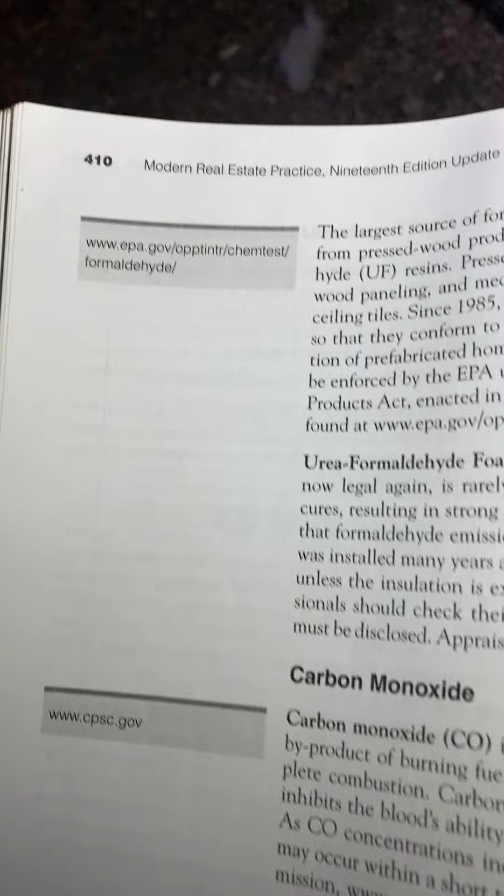Modern Real Estate Practice, page 410.

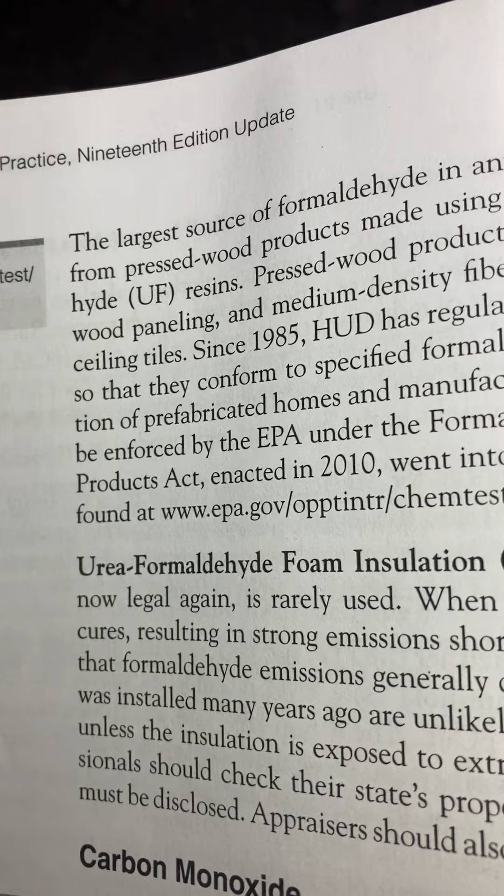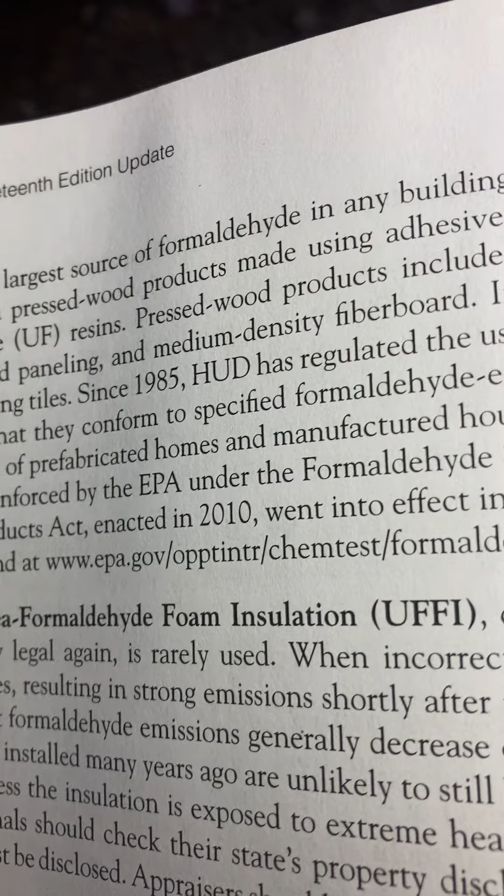The largest source of formaldehyde in any building is likely to be the off-gassing from pressed wood products made using adhesives that contain urea formaldehyde, UF resins. Pressed wood products include particle board, hardwood plywood paneling, and medium density fiberboard. It is also used in carpeting and ceiling tiles.

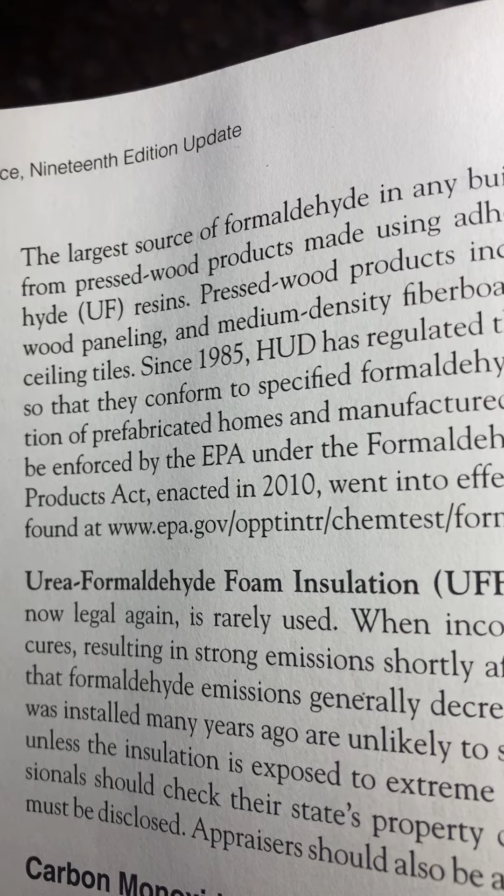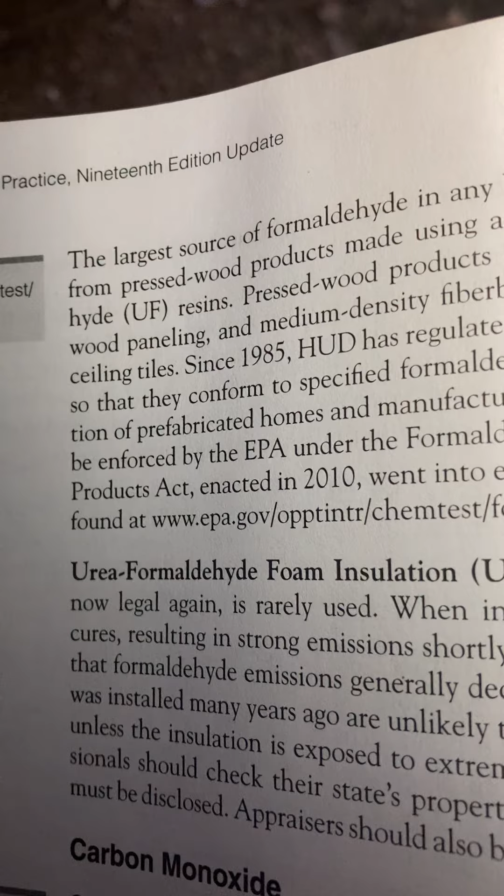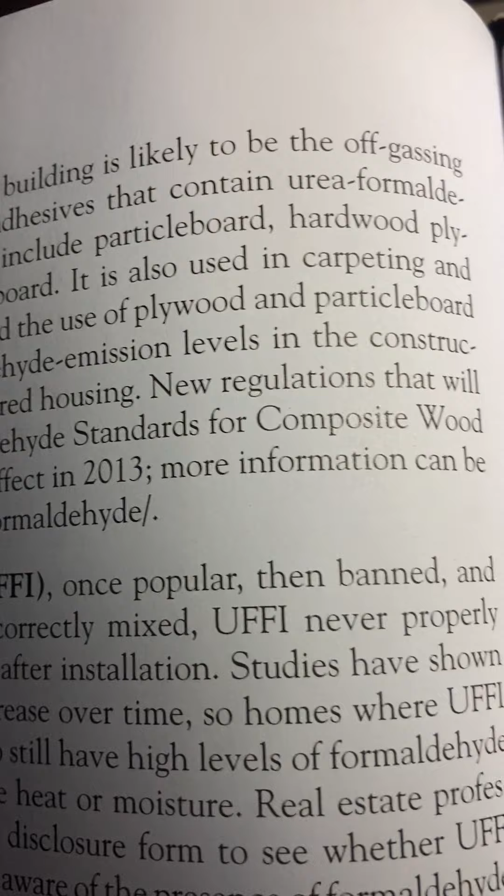Since 1985, HUD has regulated the use of plywood and particle board so that they conform to specified formaldehyde emission levels in the construction of prefabricated homes and manufactured housing.

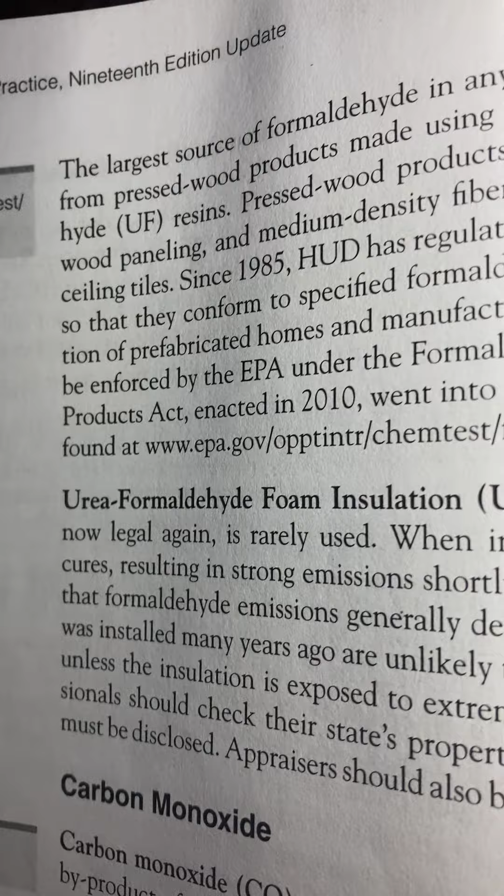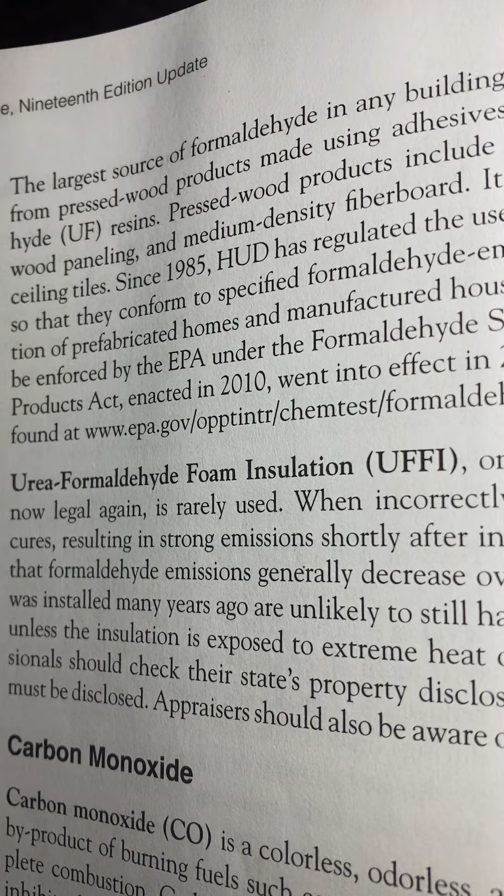New regulations that will be enforced by the EPA under the Formaldehyde Standards for Composite Wood Products Act, enacted in 2010, went into effect in 2013. More information can be found at www.epa.gov/opptintr/chemtest/formaldehyde/.

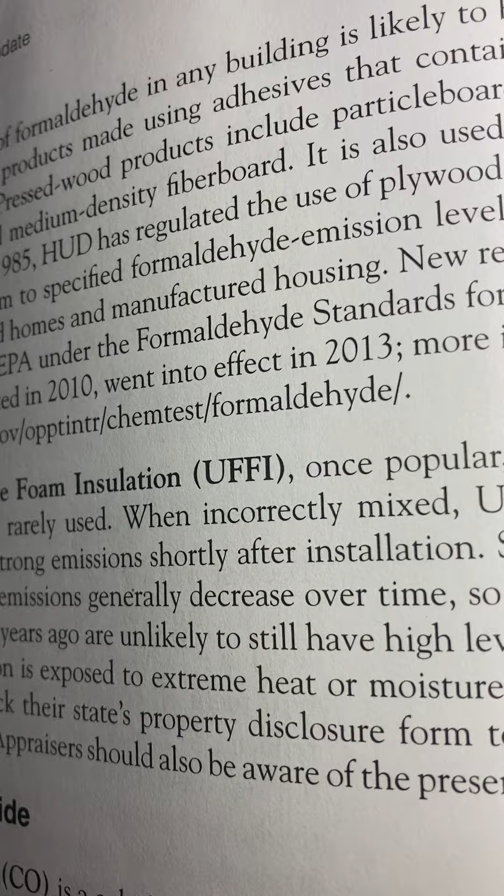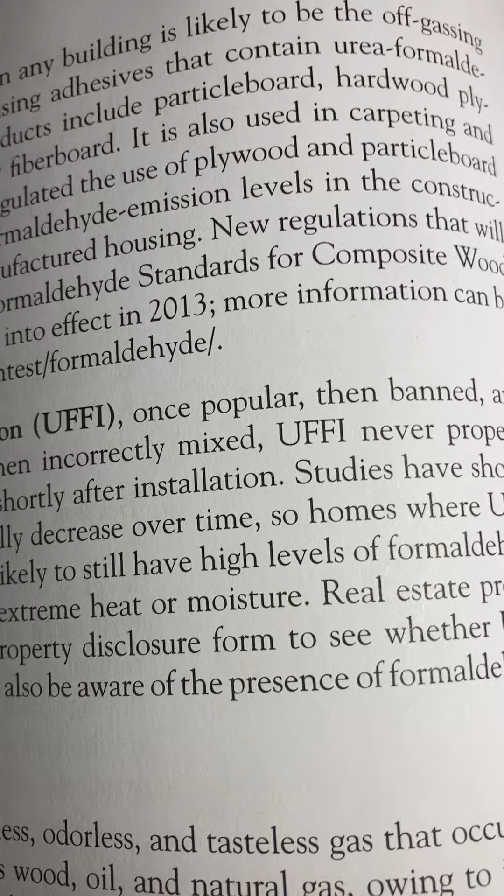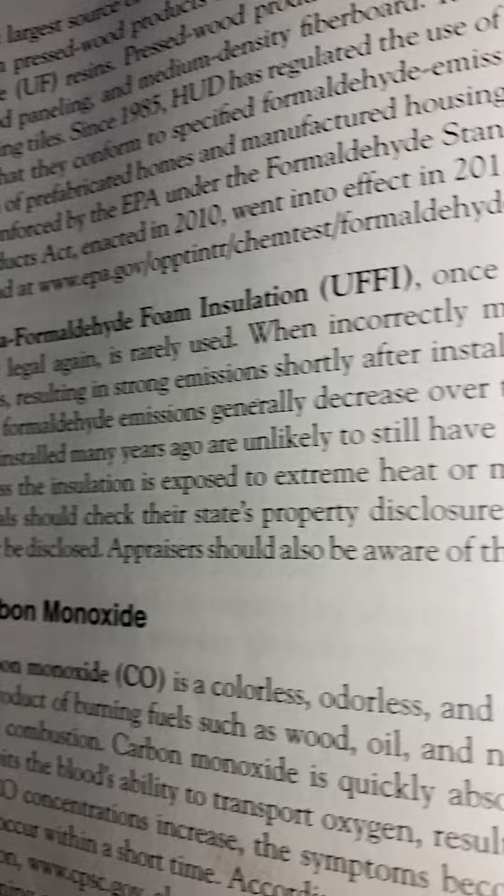Urea formaldehyde foam insulation, UFFI. Once popular, then banned, and now legal again, is rarely used. When incorrectly mixed, urea formaldehyde foam insulation never properly cures, resulting in strong emissions shortly after installation.

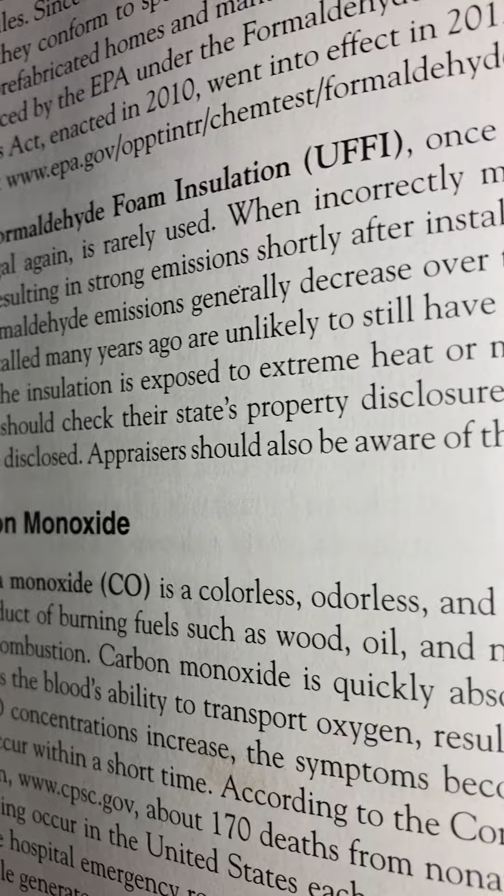Studies have shown that formaldehyde emissions generally decrease over time. So homes where urea formaldehyde foam insulation was installed many years ago are unlikely to still have high levels of formaldehyde unless the insulation is exposed to extreme heat or moisture.

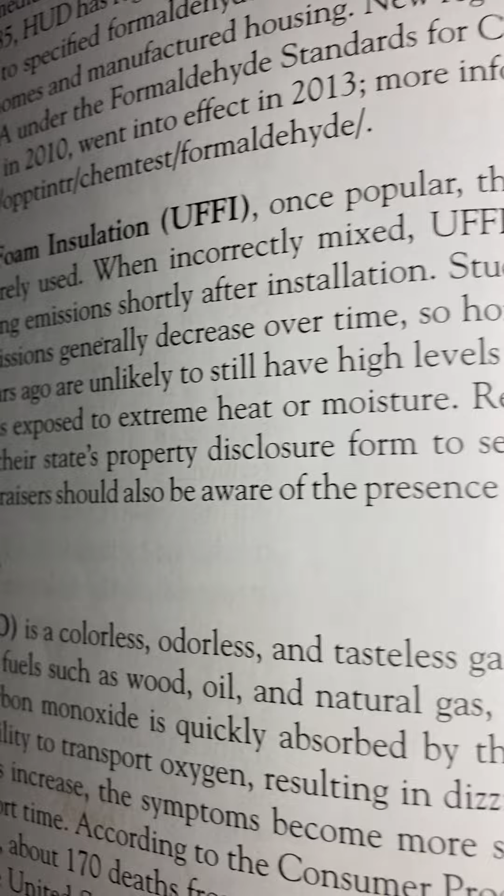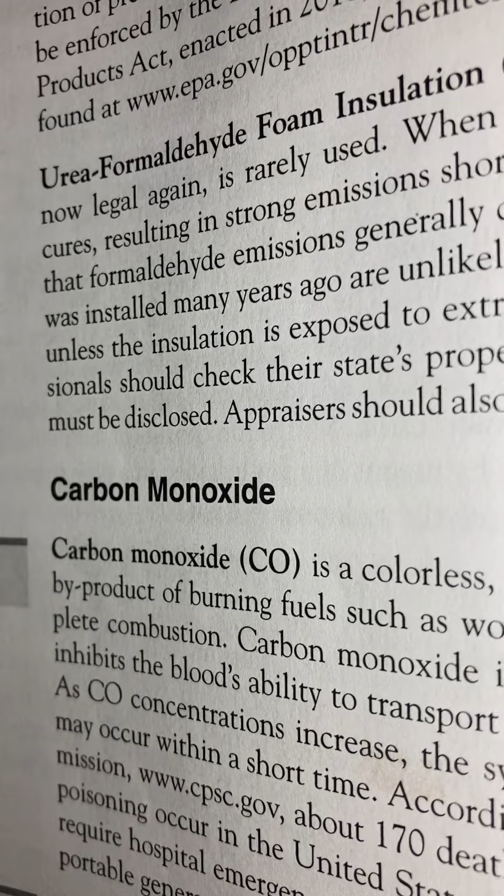Real estate professionals should check their state's property disclosure form to see whether urea formaldehyde foam insulation must be disclosed. Appraisers should also be aware of the presence of formaldehyde.

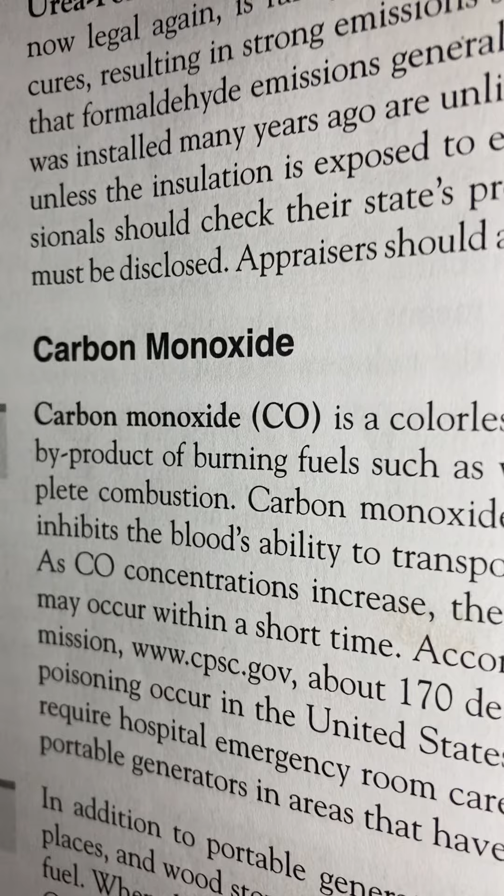Carbon monoxide. Carbon monoxide, CO, is a colorless, odorless, and tasteless gas that occurs as a byproduct of burning fuels such as wood, oil, and natural gas.

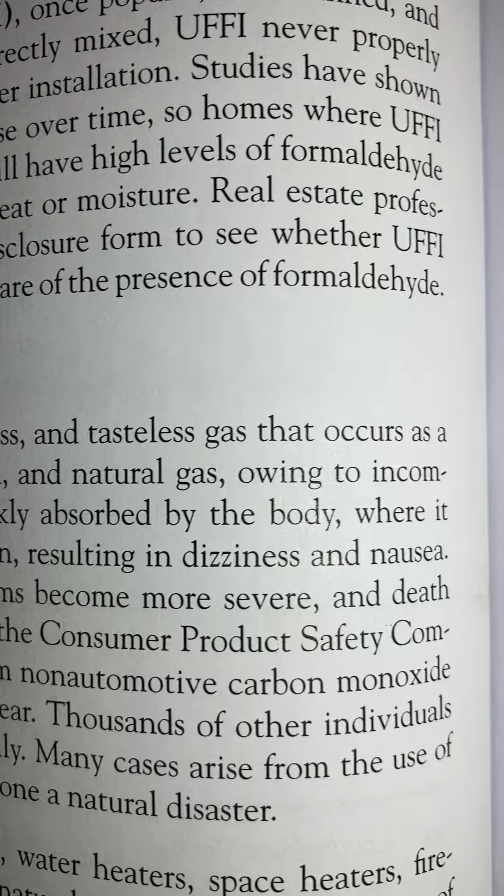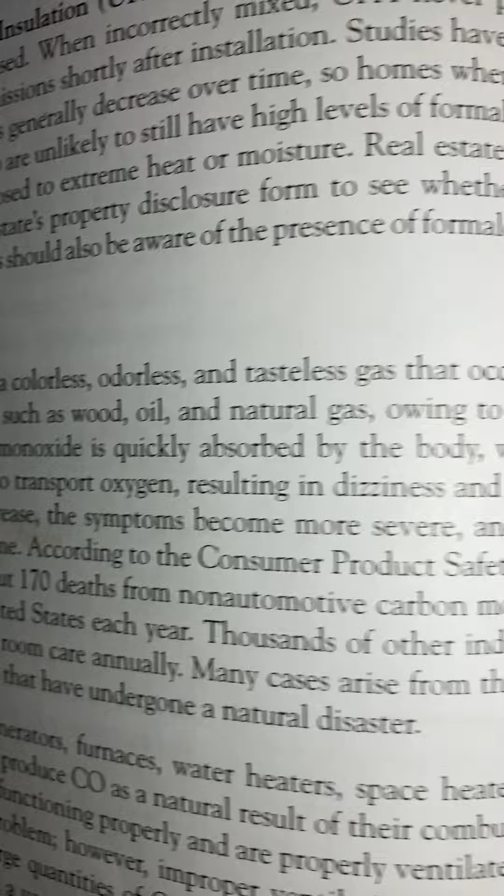Owing to incomplete combustion, carbon monoxide is quickly absorbed by the body, where it inhibits the blood's ability to transport oxygen, resulting in dizziness and nausea.

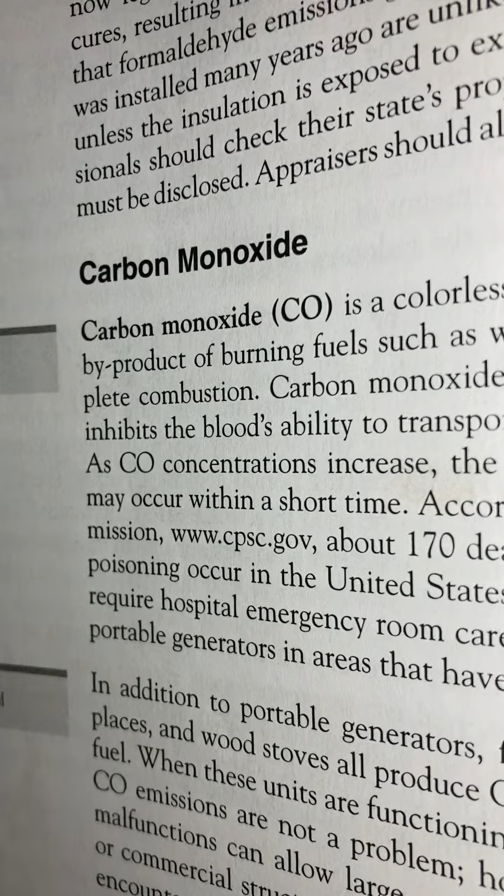As carbon monoxide concentrations increase, the symptoms become more severe, and death may occur within a short time.

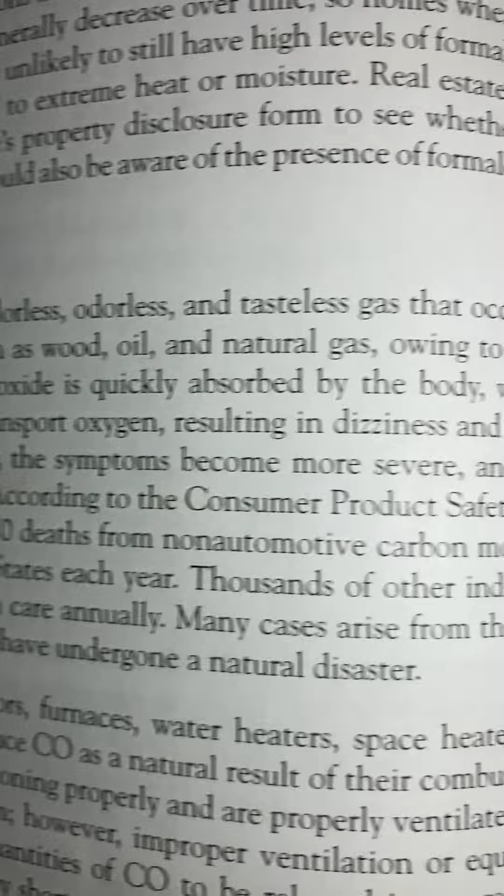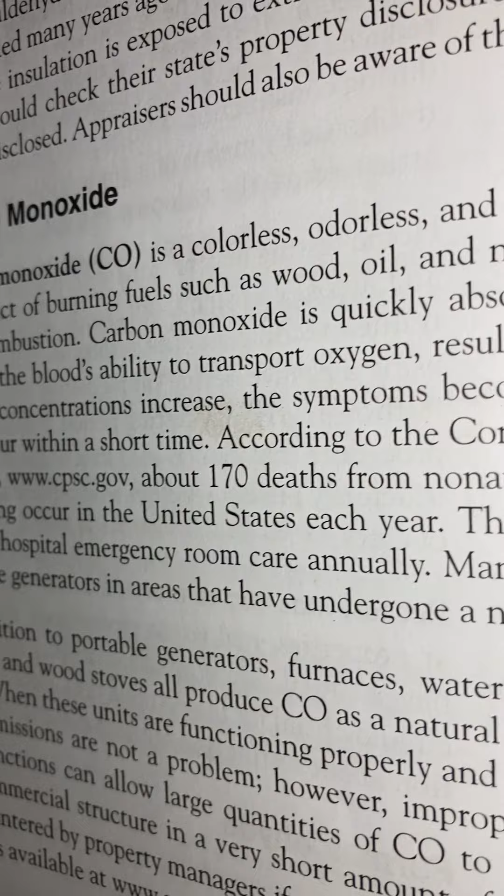According to the Consumer Product Safety Commission, www.cpsc.gov, about 170 deaths from non-automotive carbon monoxide poisoning occur in the United States each year. Thousands of other individuals require hospital emergency room care annually. Many cases arise from the use of portable generators in areas that have undergone a natural disaster.

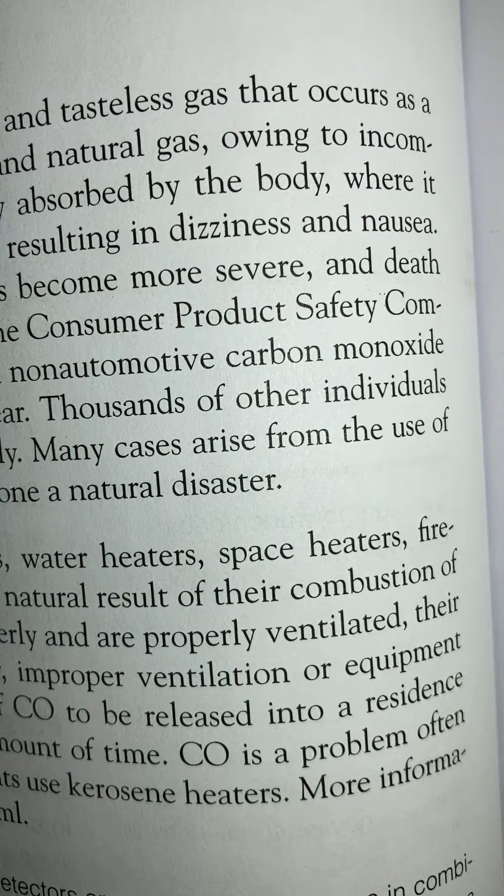In addition to portable generators, furnaces, water heaters, space heaters, fireplaces, and wood stoves all produce CO as a natural result of their combustion of fuel. When these units are functioning properly and are properly ventilated, their CO emissions are not a problem. However,

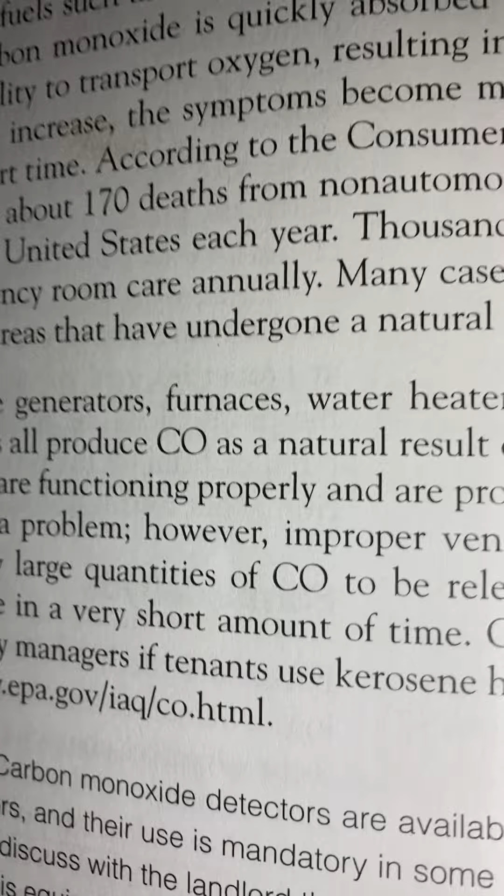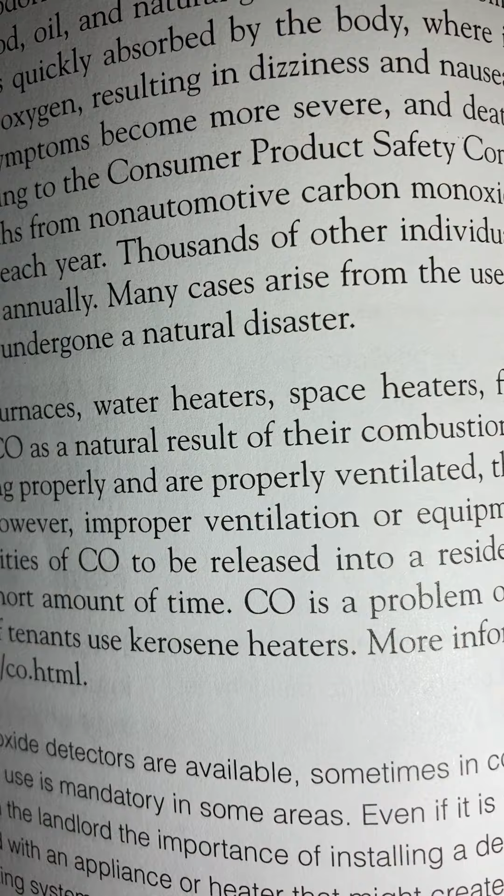improper ventilation or equipment malfunctions can allow large quantities of carbon monoxide to be released into a residence or commercial structure in a very short amount of time. Carbon monoxide is a problem often encountered by property managers if tenants use kerosene heaters.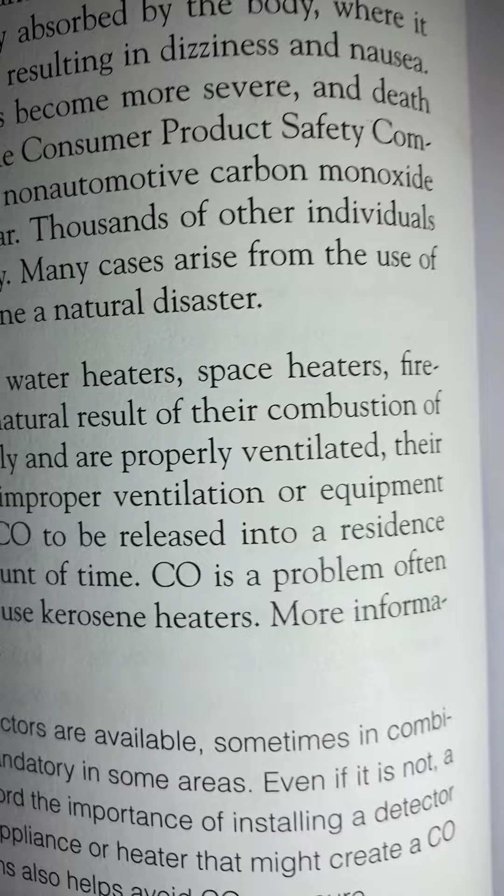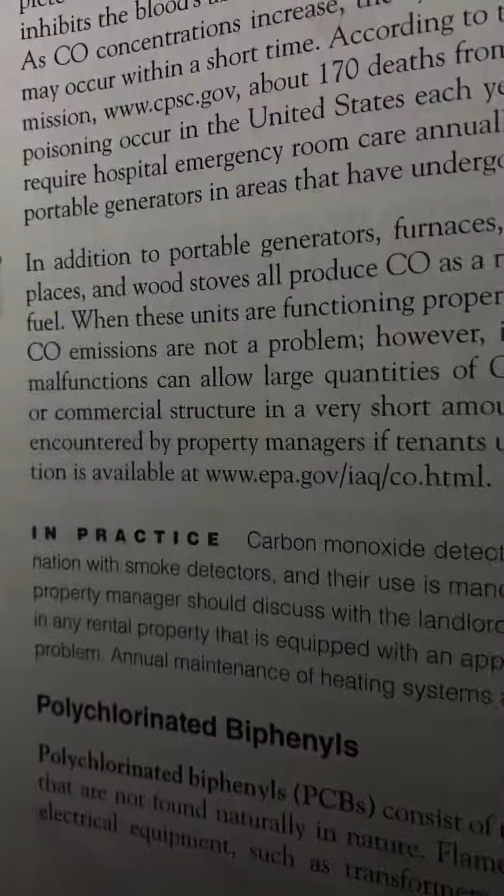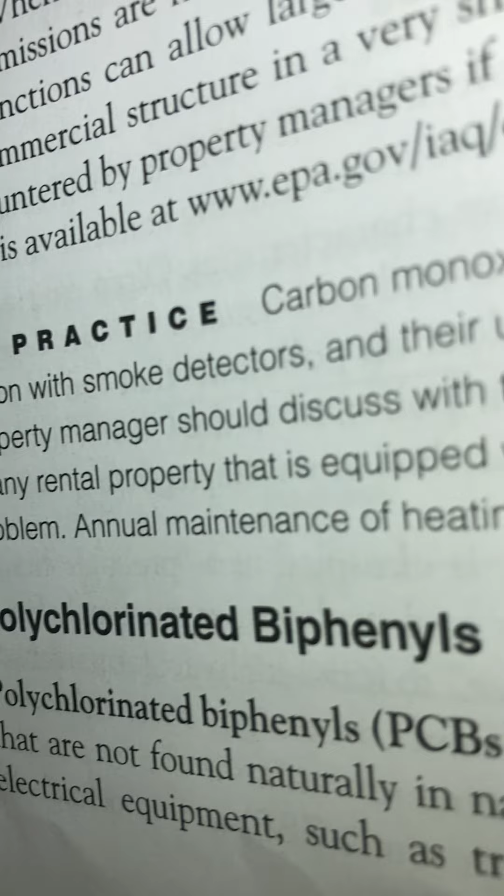More information is available at www.epa.gov/IAQ/co.html. In practice, carbon monoxide detectors are available, sometimes in combination with smoke detectors. And their use is mandatory in some areas.

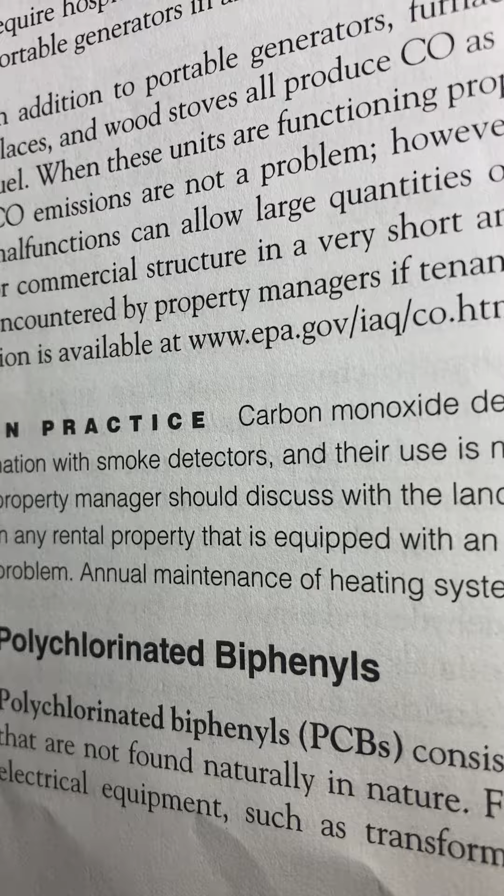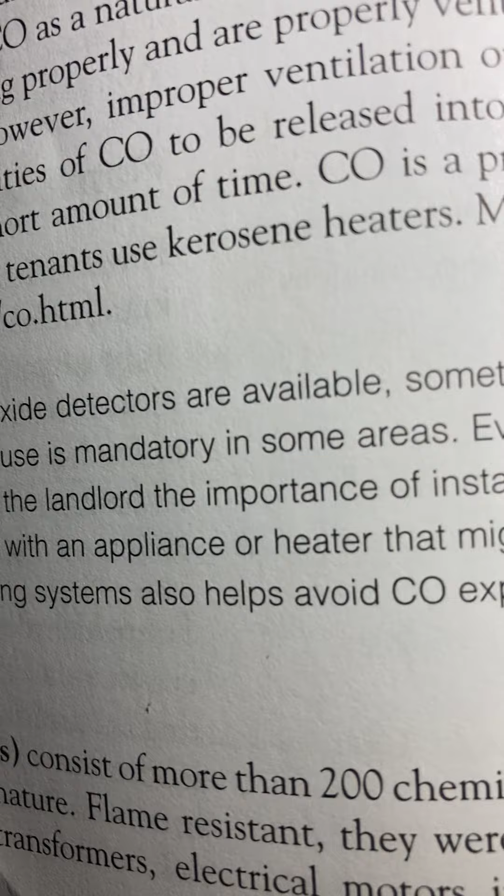Even if it is not, a property manager should discuss with the landlord the importance of installing a detector in any rental property that is equipped with an appliance or heater that might create a carbon monoxide problem. Annual maintenance of heating systems also helps avoid carbon monoxide exposure.

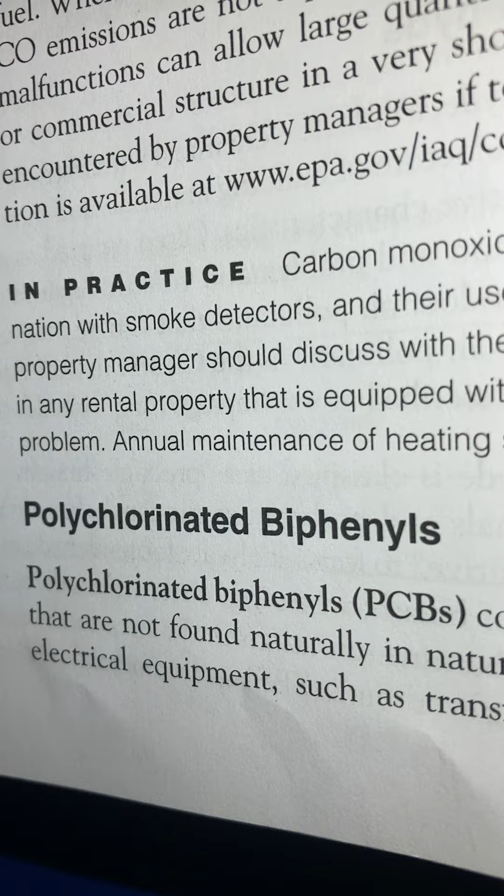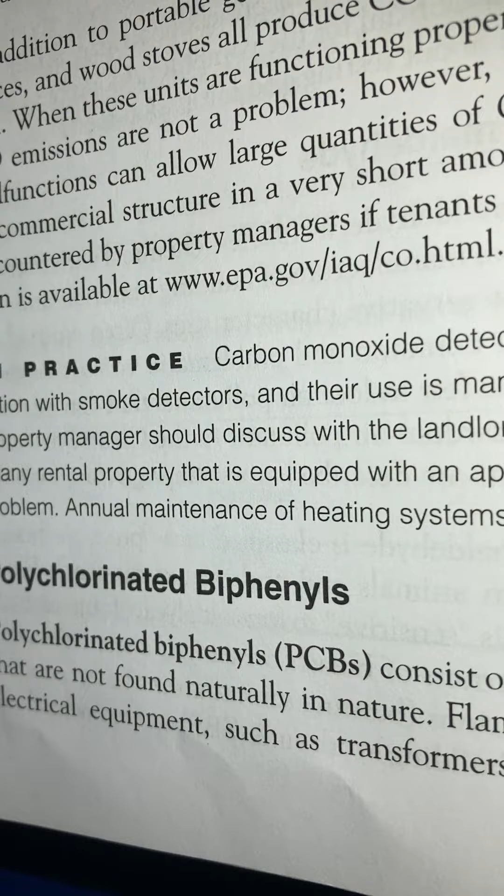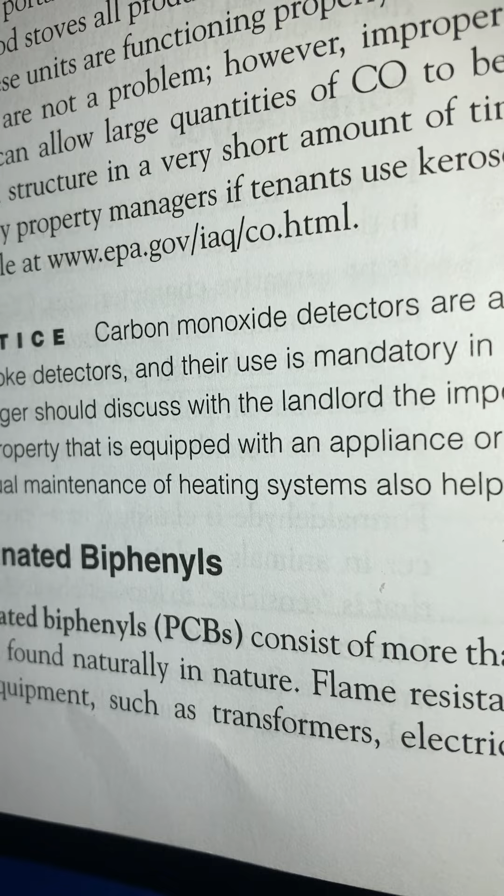Polychlorinated biphenyls. Polychlorinated biphenyls, PCBs, consist of more than 200 chemical compounds that are not found naturally in nature. Flame resistant, they were often used in electrical equipment, such as transformers, electrical motors, in refrigerators.

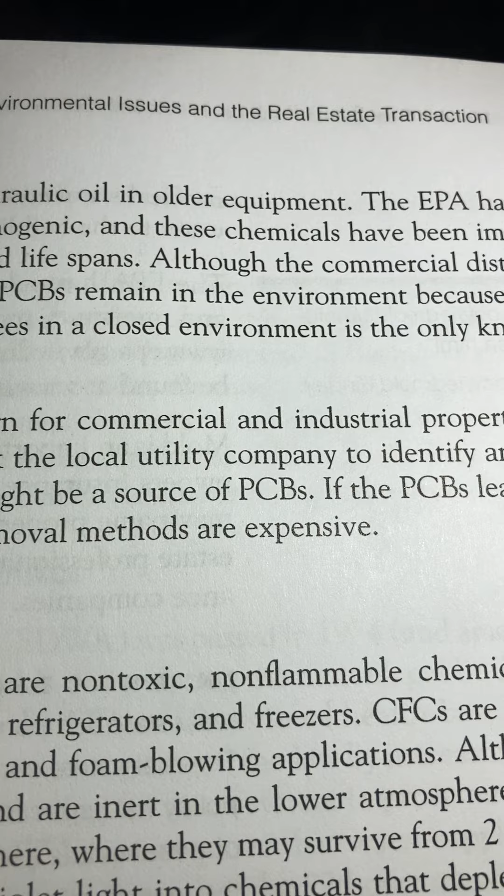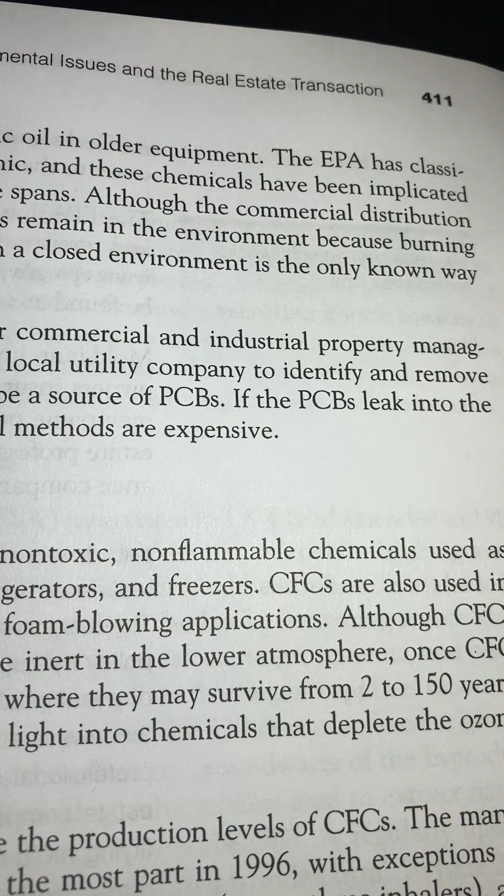The EPA has classified polychlorinated biphenyls as reasonably carcinogenic, and these chemicals have been implicated in lower fertility and shortened lifespans.

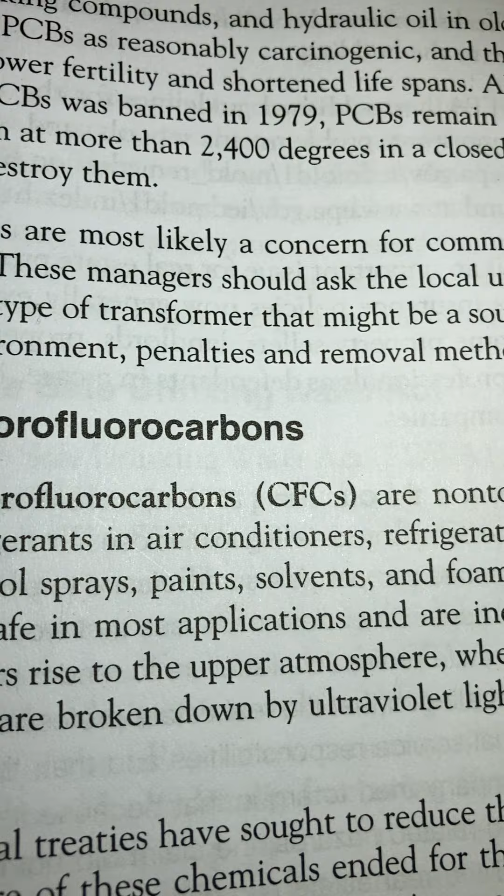Although the commercial distribution of polychlorinated biphenyls was banned in 1979, polychlorinated biphenyls remain in the environment because burning them at more than 2,400 degrees in a closed environment is the only known way to destroy them.

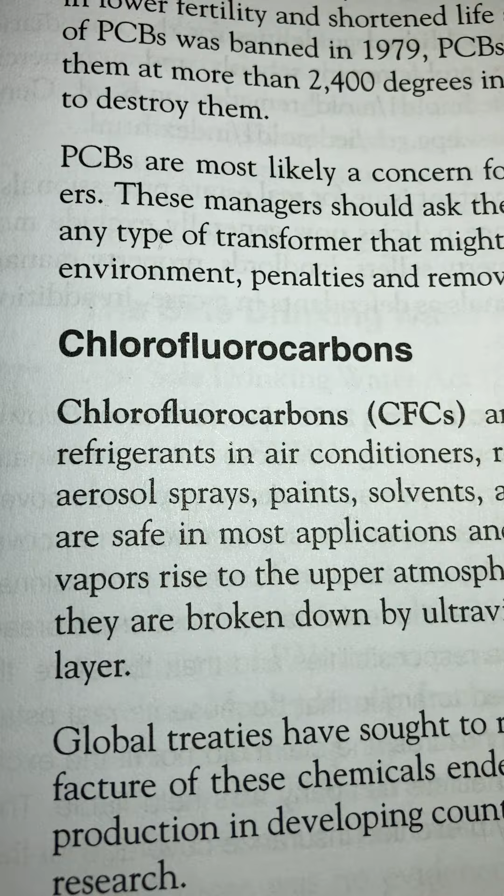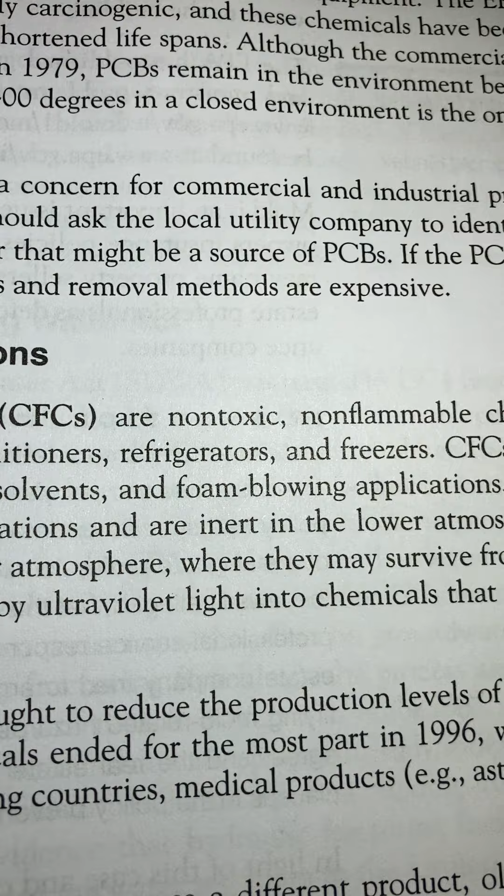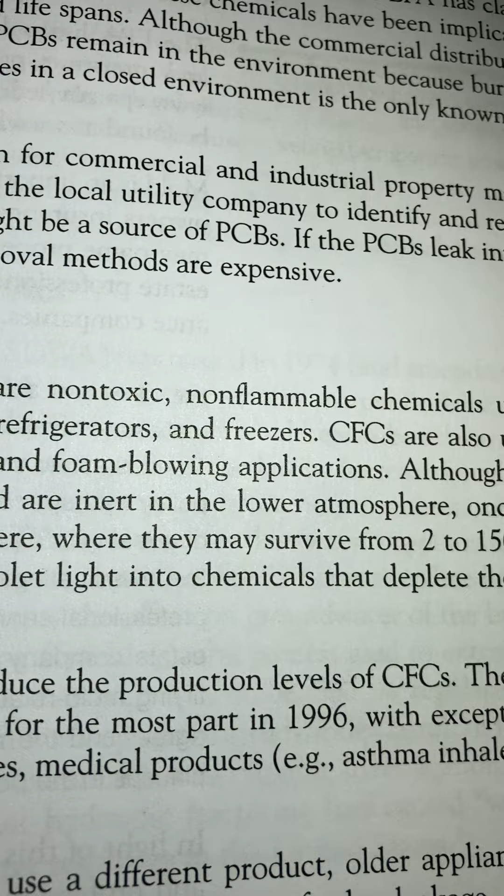Polychlorinated biphenyls are most likely a concern for commercial and industrial property managers. These managers should ask the local utility company to identify and remove any type of transformer that might be a source of polychlorinated biphenyls. If the polychlorinated biphenyls leak into the environment, penalties and removal methods are expensive.

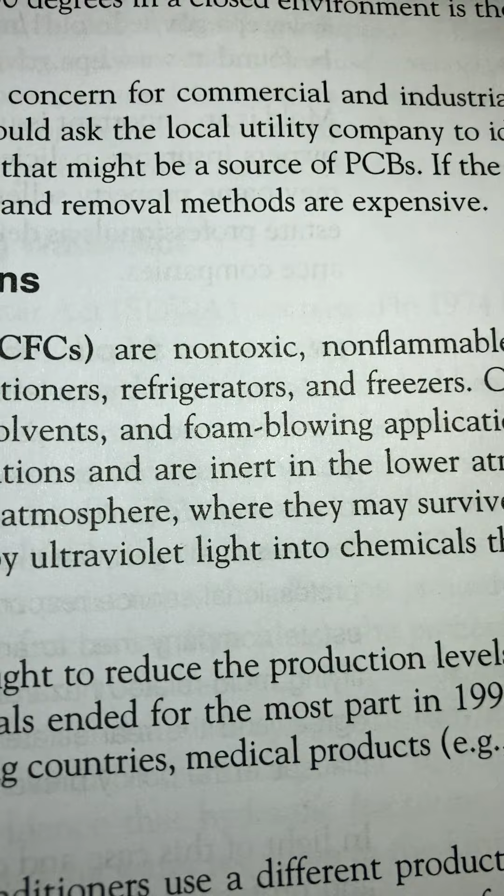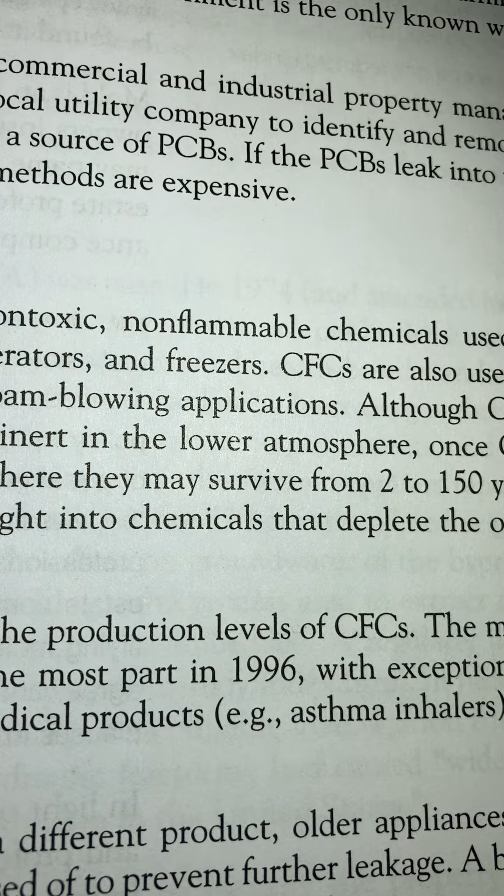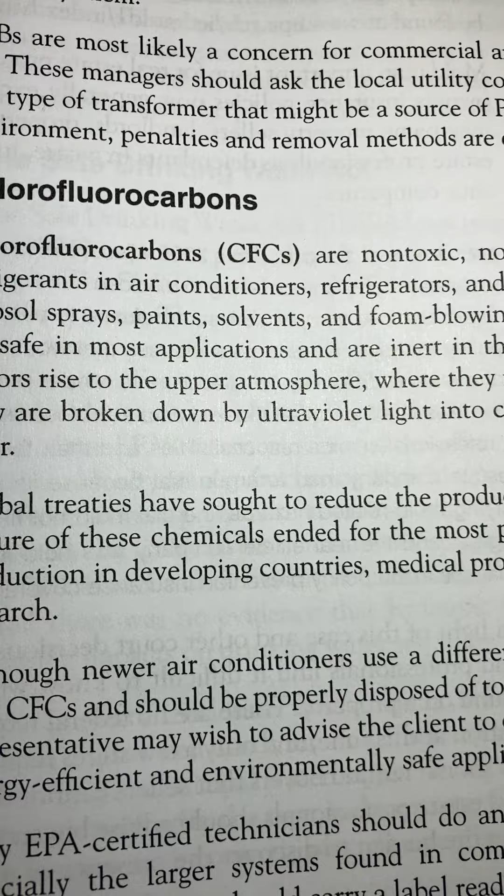Chlorofluorocarbons. Chlorofluorocarbons, CFCs, are non-toxic, non-flammable chemicals used as refrigerants in air conditioners, refrigerators, and freezers. Chlorofluorocarbons are also used in aerosol sprays, paints, solvents, and foam blowing applications.

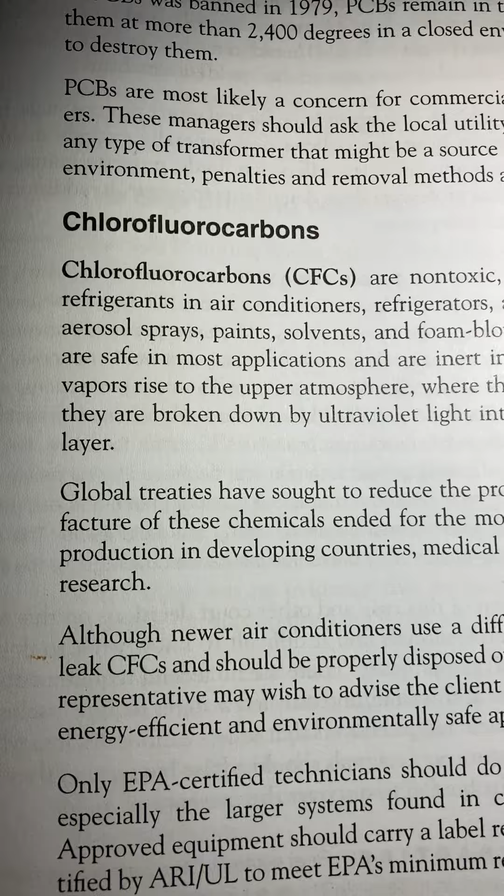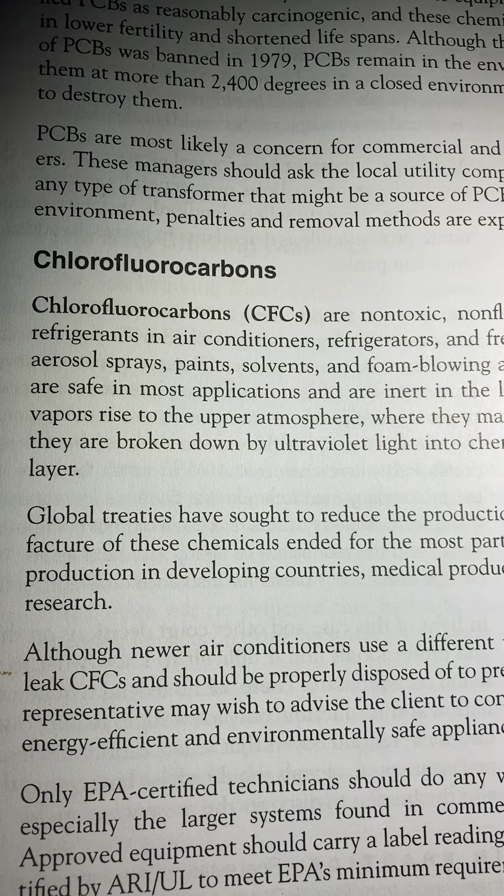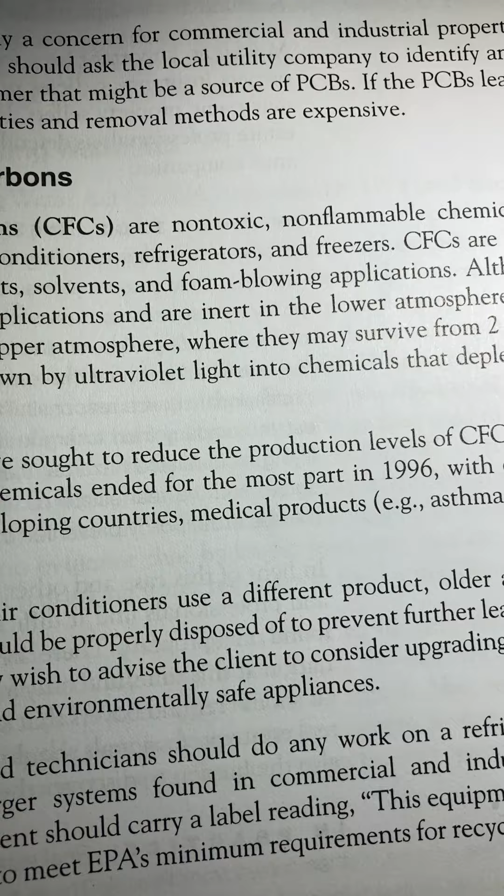Although chlorofluorocarbons are safe in most applications and are inert in the lower atmosphere, once chlorofluorocarbon vapors rise to the upper atmosphere, where they may survive from 2 to 150 years, they are broken down by ultraviolet light into chemicals that deplete the ozone layer.

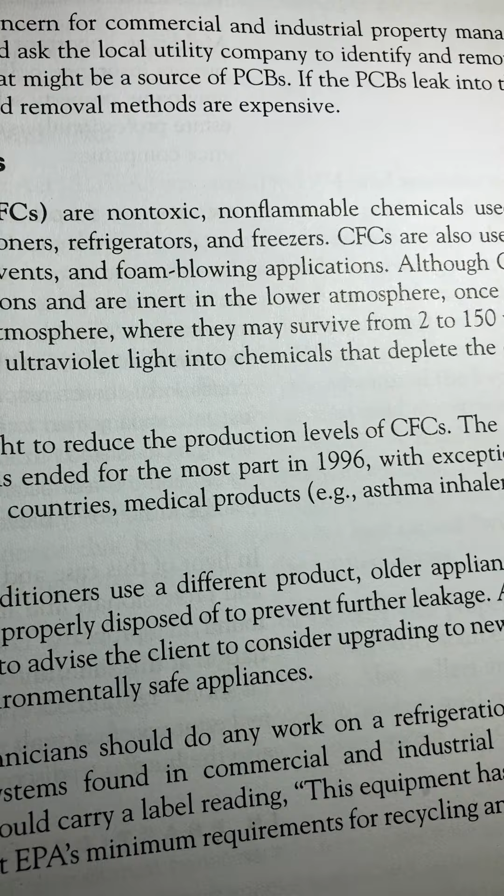Global treaties have sought to reduce the production levels of chlorofluorocarbons. The manufacture of these chemicals ended, for the most part, in 1996, with exceptions for production in developing countries, medical products, for instance asthma inhalers, and research.

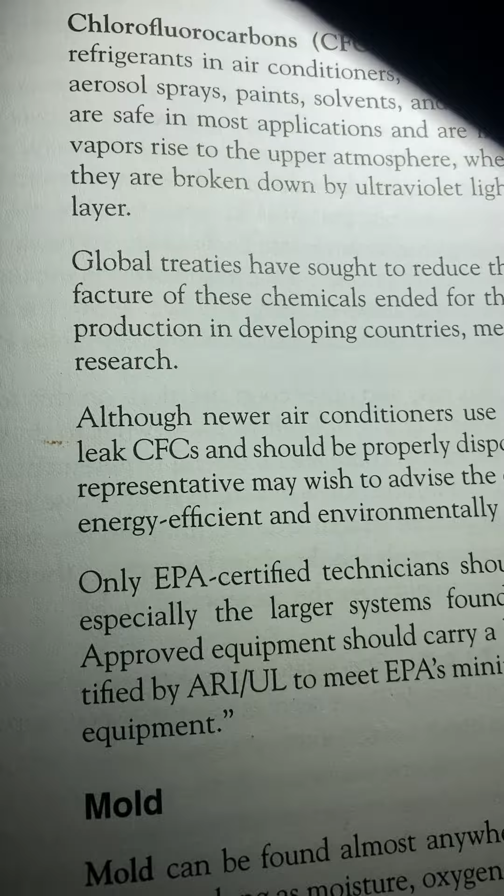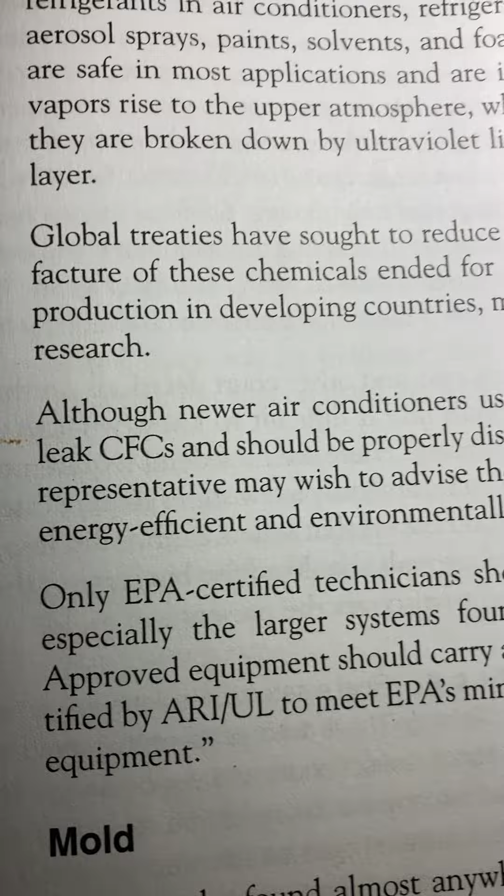Although newer air conditioners use a different product, older appliances may leak chlorofluorocarbons and should be properly disposed of to prevent further leakage.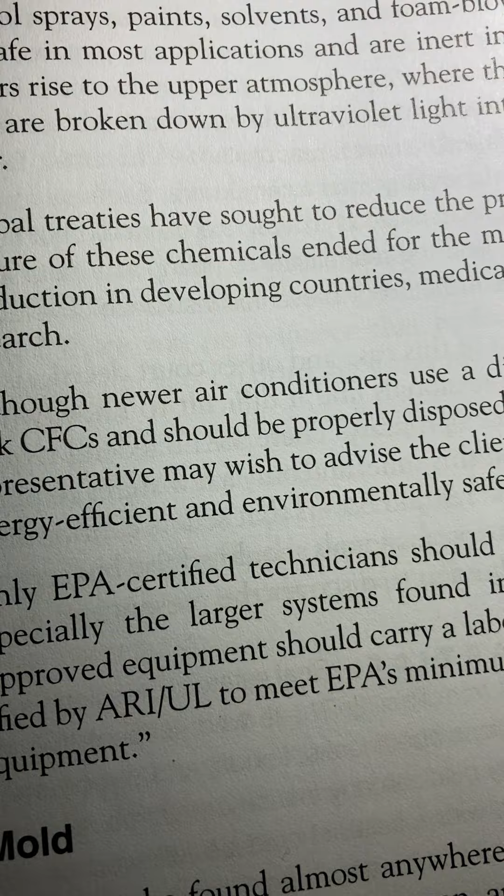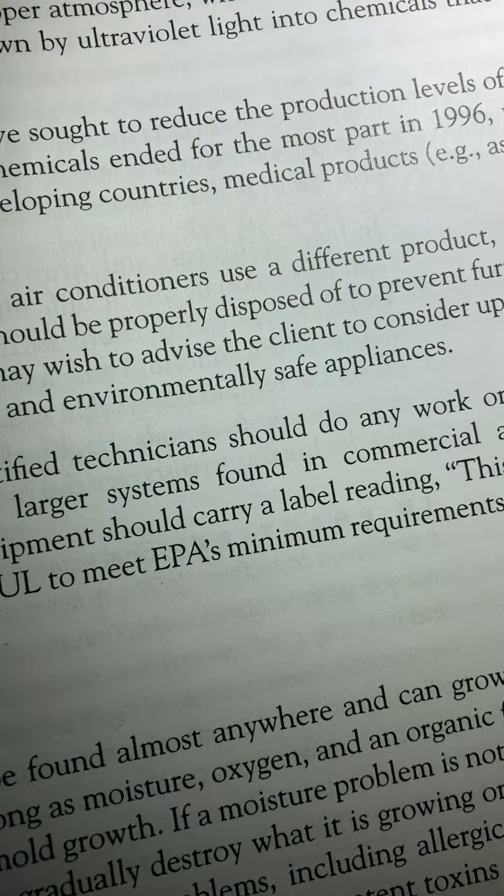A buyer's representative may wish to advise the client to consider upgrading to newer, more energy efficient, and environmentally safe appliances.

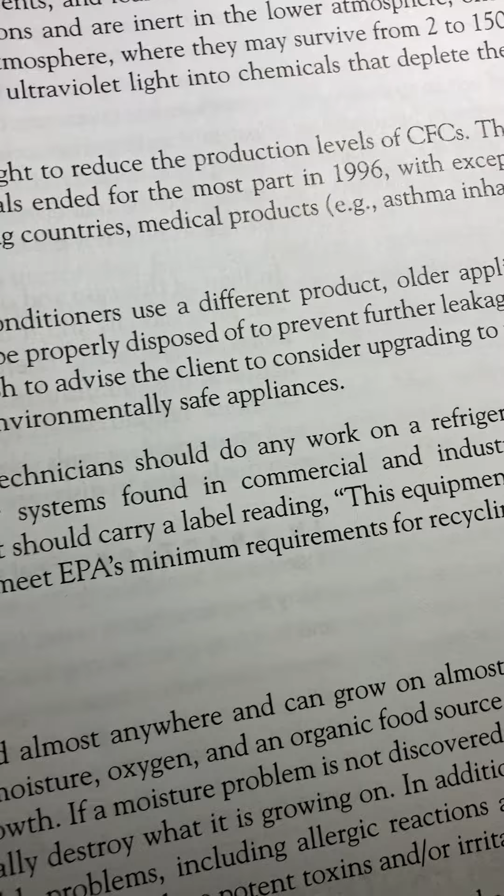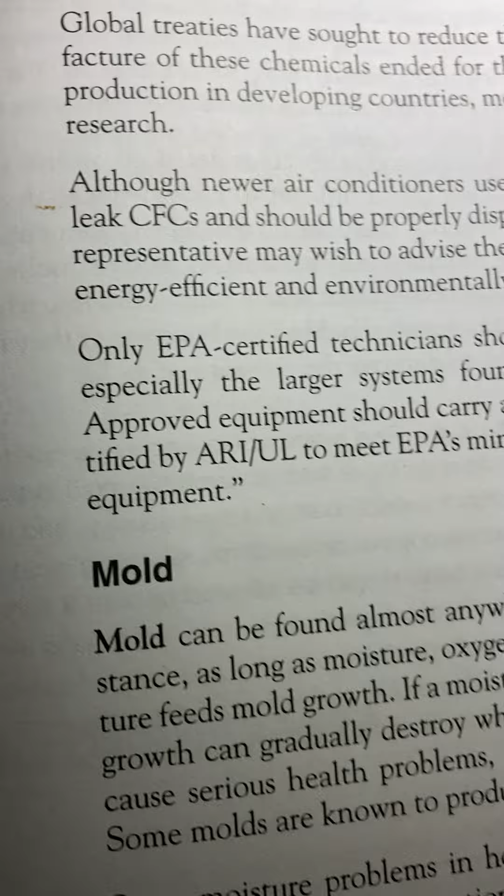Only EPA certified technicians should do any work on a refrigeration system, especially the larger systems found in commercial and industrial buildings. Approved equipment should carry a label reading, "This equipment has been certified by ARI/UL to meet EPA's minimum requirements for recycling and recovery equipment."

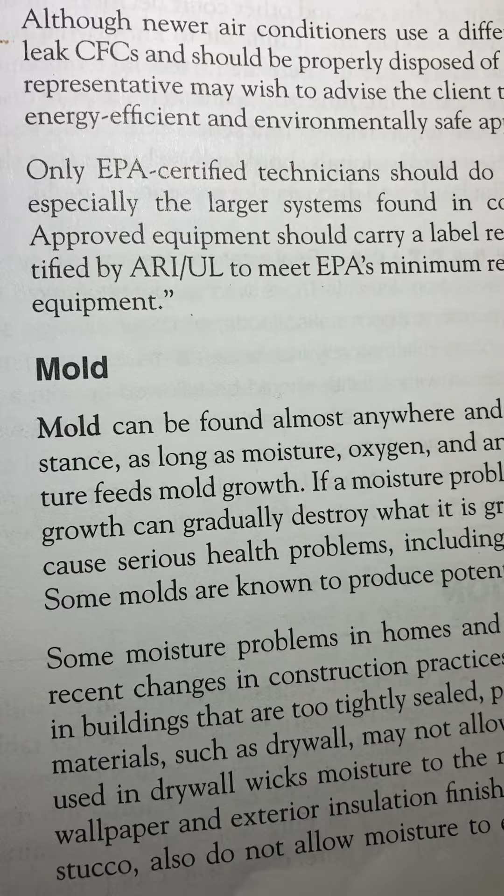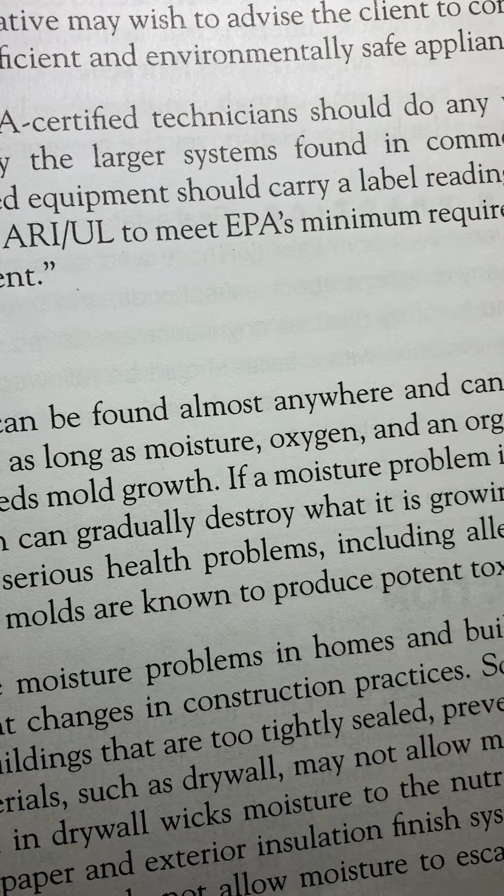Mold. Mold can be found almost anywhere and can grow on almost any organic substance as long as moisture, oxygen, and an organic food source are present.

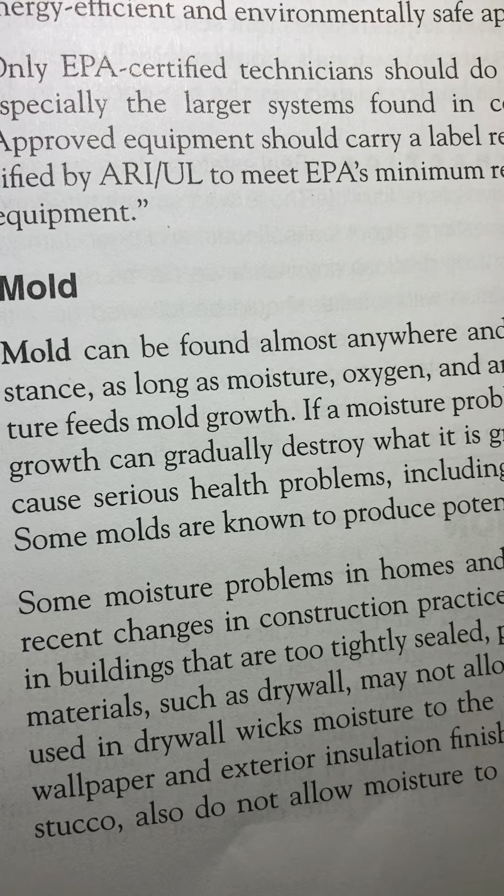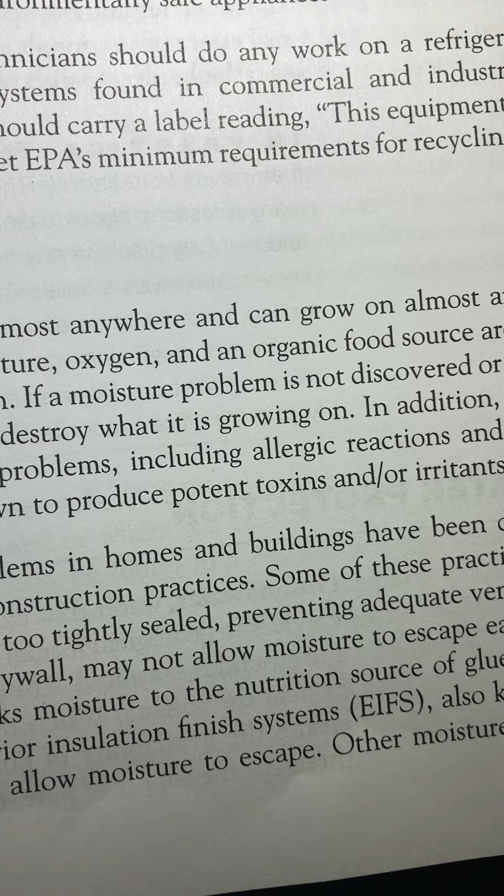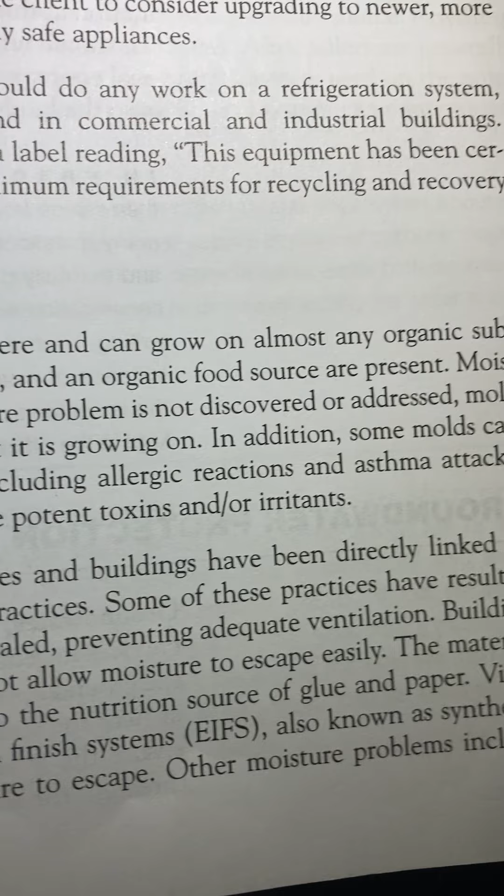Moisture feeds mold growth. If a moisture problem is not discovered or addressed, mold growth can gradually destroy what it is growing on. In addition, some molds can cause serious health problems, including allergic reactions and asthma attacks.

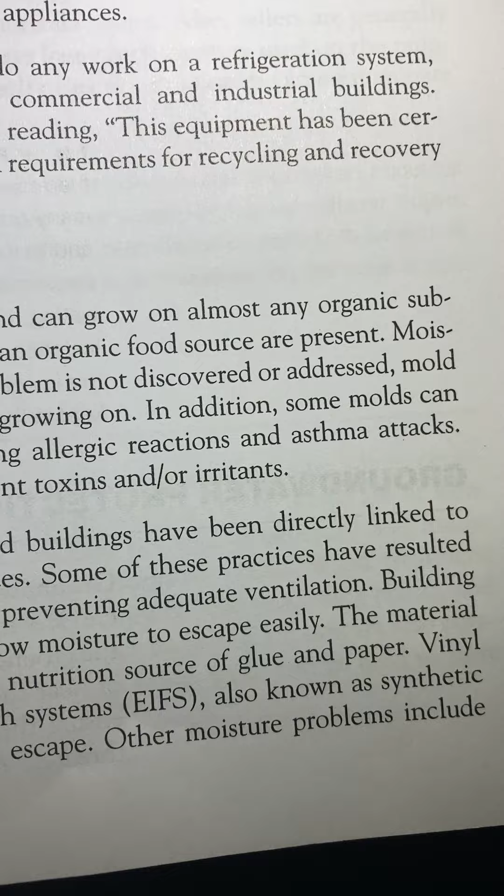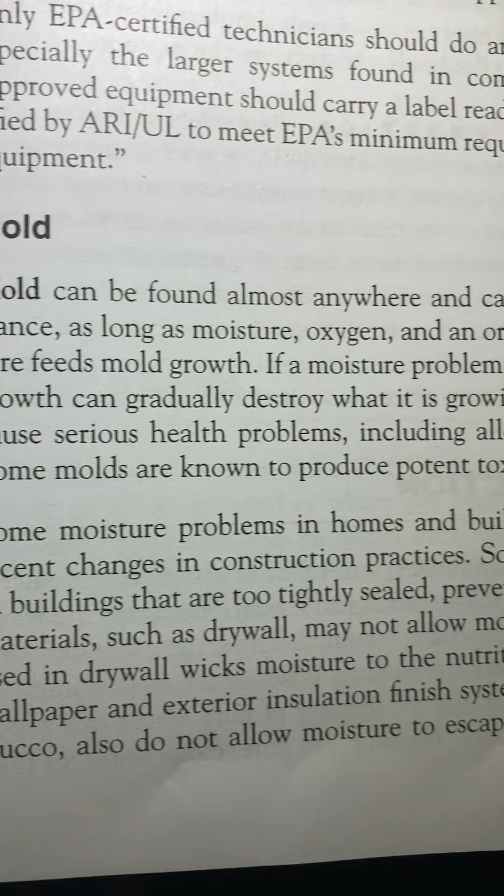Some molds are known to produce potent toxins and/or irritants. Some moisture problems in homes and buildings have been directly linked to recent changes in construction practices. Some of these practices have resulted in buildings that are too tightly sealed, preventing adequate ventilation.

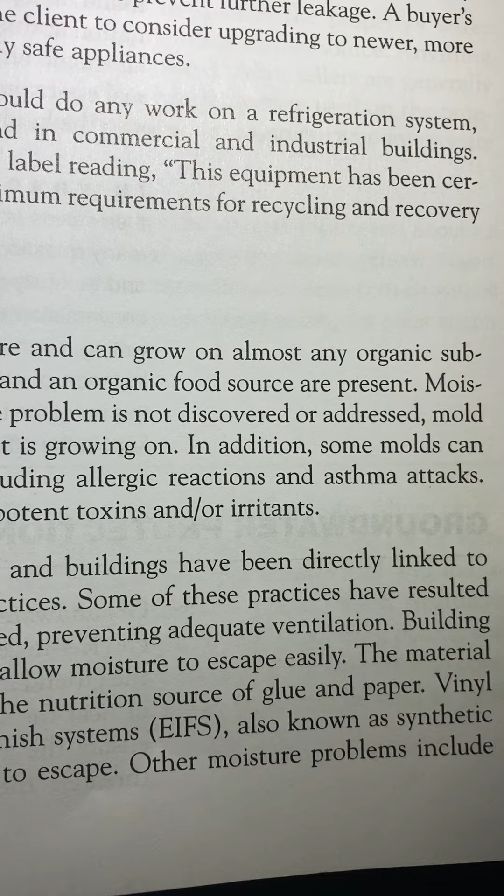Building materials such as drywall may not allow moisture to escape easily. The material used in drywall wicks moisture to the nutrition source of glue and paper.

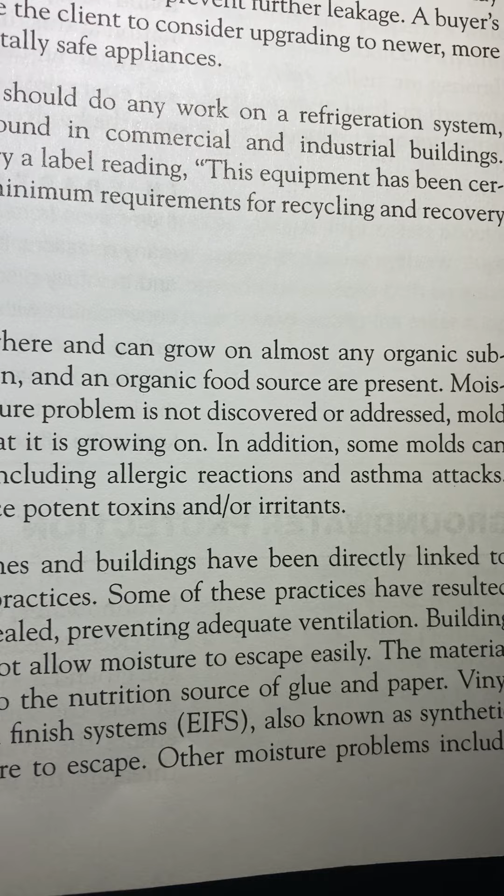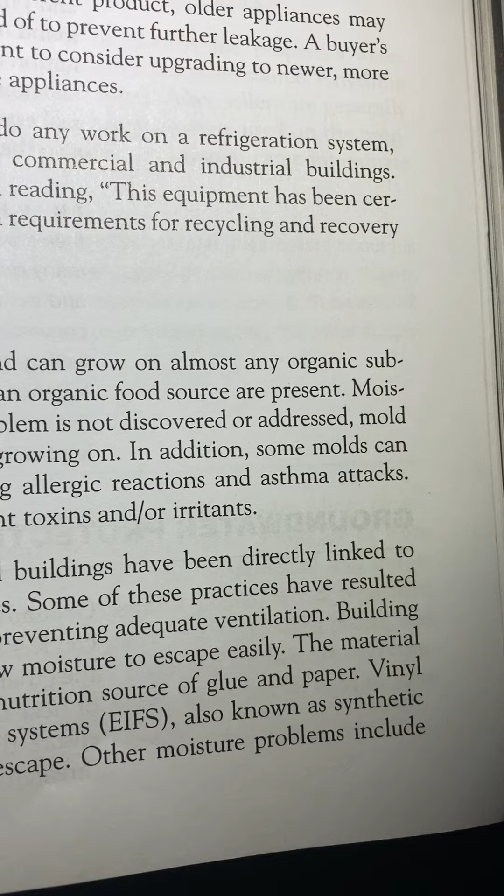Vinyl wallpaper and exterior insulation finish systems, EIFS, also known as synthetic stucco, also do not allow moisture to escape. Other moisture problems include...